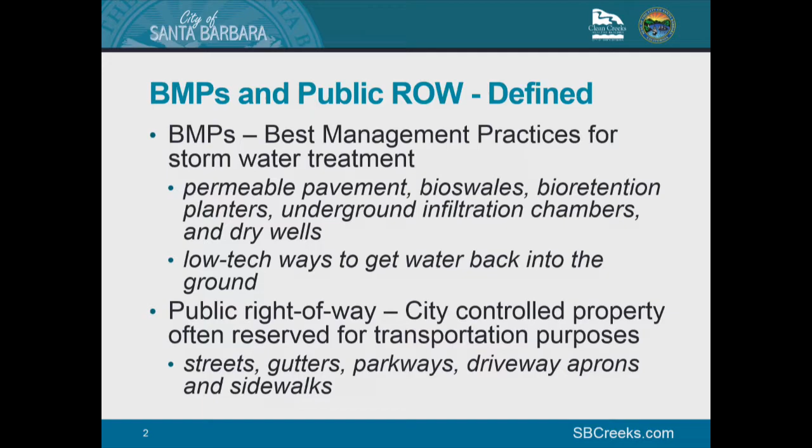The purpose of stormwater requirements in the public right-of-way is the same as for private parcels. It's to remove pollutants from stormwater falling on impervious area and to make development more water quality friendly. Not all projects proposed in the right-of-way are required to meet stormwater requirements. Only discretionary projects are required to meet stormwater requirements. So this is in contrast to a ministerial project or a staff-approved project. Discretionary review includes Single-Family Design Board, Architectural Board of Review, Historic Landmarks Commission, Staff Hearing Officer, and Planning Commission.

If your project needs to go to any of those and it proposes at least 1 square foot of new or replaced impervious area in the right-of-way, it's going to have to do stormwater requirements. So Tier 2 requirements kick in between 1 and 500 square feet of new or replaced impervious area. A Tier 2 project is really a demonstration project. Hopefully, it's more than that, but at a minimum, just one of the BMPs has to be installed.

So Tier 3 projects, on the other hand, that's when 500 square feet or more of new or replaced impervious area is proposed. And that involves treating a 1-inch 24-hour storm for a specified project site.

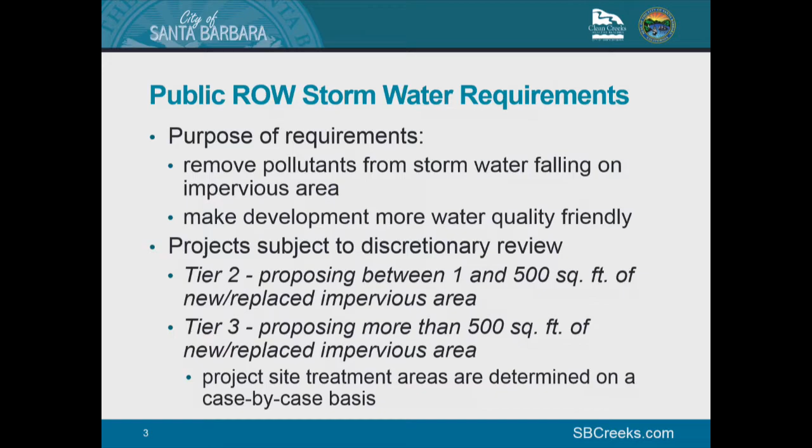In contrast to a private parcel Tier 3 project where the entire parcel has to be treated, since the public right-of-way encompasses the entire city, when Tier 3 is triggered, you don't have to do the entire city for stormwater treatment. There's a set project area that's determined on a case-by-case basis for that project.

Some recent Tier 3 projects in the public road that you might be familiar with: Las Positas Road Cliff Drive Roundabout, the La Cumbre Road Sidewalk Infill Project, the Old Coast Highway Sidewalk Infill Project, and all upcoming bridge replacement projects. Those are all Tier 3, and they installed extensive BMPs in the right-of-way that are treating a lot of road runoff.

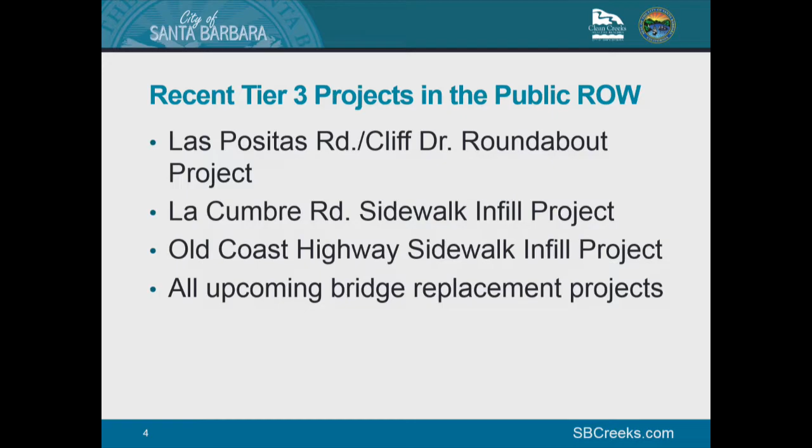Next, we'll talk about the different types of BMPs that can be installed in the right-of-way. One type of BMP that we're pretty excited about are dry wells. We don't have any of these installed in the right-of-way yet, but these are large underground concrete chambers. They fill up with stormwater. We install them over gravel and a really sandy soil to get a high infiltration rate.

And one caveat on these is that they have to be installed where groundwater is really deep. We can't install them where groundwater is shallow because there's not enough treatment that happens, and we don't want to pollute the groundwater. So we're really looking for a minimum of 30 feet from street level to groundwater, but preferably much more, 50, 80, 100 feet to groundwater.

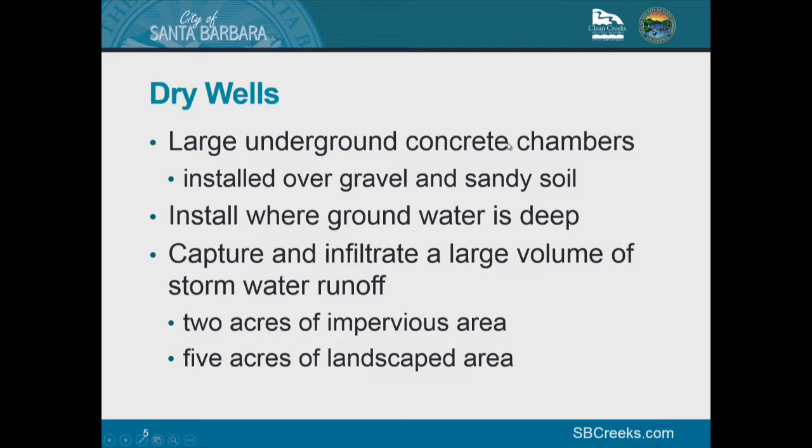So with a dry well, you can capture and treat a really large volume of stormwater runoff, up to 2 acres of impervious area and 5 acres of landscaped area for up to 7 acres total of stormwater treatment. As I mentioned, no dry wells currently in the public right-of-way, but the Creeks Division is planning to do a pilot project where we install 2 dry wells in the public right-of-way to see how they work.

We have high hopes. We're thinking that they're going to be a really efficient use of space in the right-of-way. Very small footprint. You won't see much on the surface. You might see a couple manholes and an inlet for stormwater to flow into. But all of it's underground, and there's a lot that happens underground. We'll get to that in a minute.

We're also hoping that it's a low cost per acre of stormwater treatment. I mentioned, up to 7 acres. We're not sure on the cost yet, but we'll have a better idea after the pilot project. But we're thinking it's going to be a pretty efficient stormwater treatment cost. As an added bonus, groundwater recharge and improved creek and ocean water quality come along with dry wells.

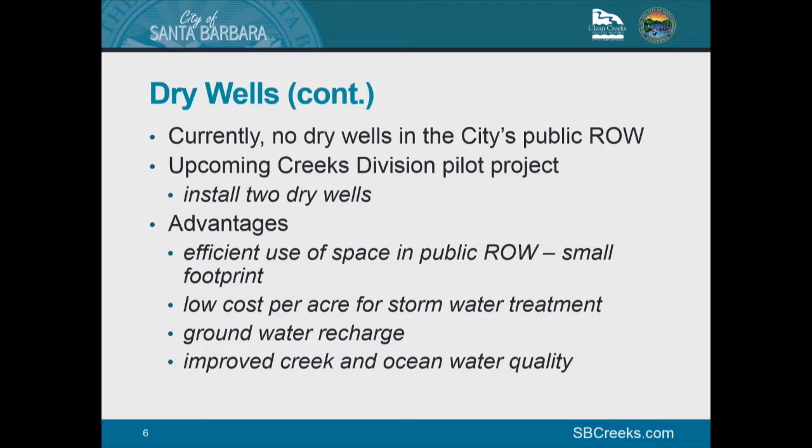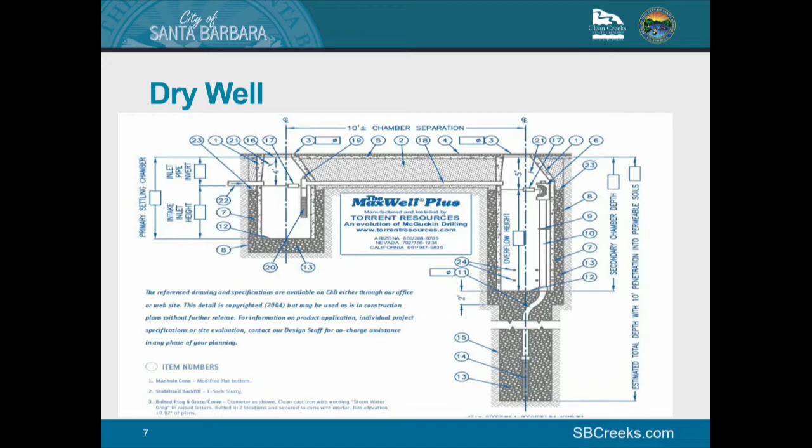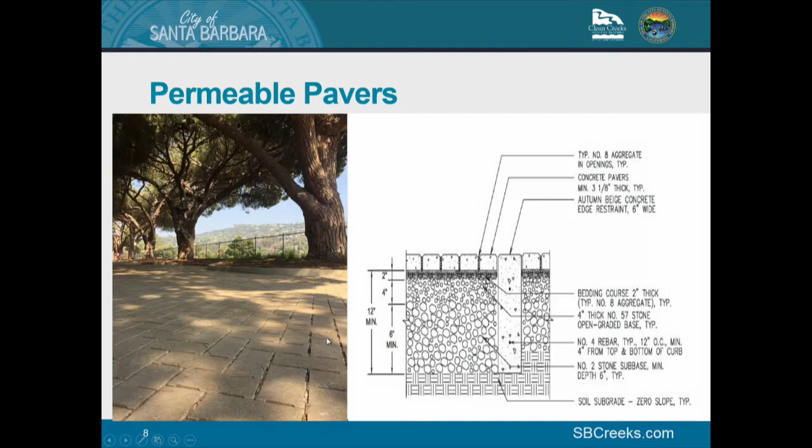Permeable pavers are another type of BMP that's commonly installed in the right-of-way. The Creeks Division has installed a lot of these all over town. I know you all are very familiar with them. We've got them installed on sidewalks. We've done alleys. And this photo on the left is of Quarantina Street. I think you might have all been out there. We've got 2 blocks of street that's done in permeable pavers.

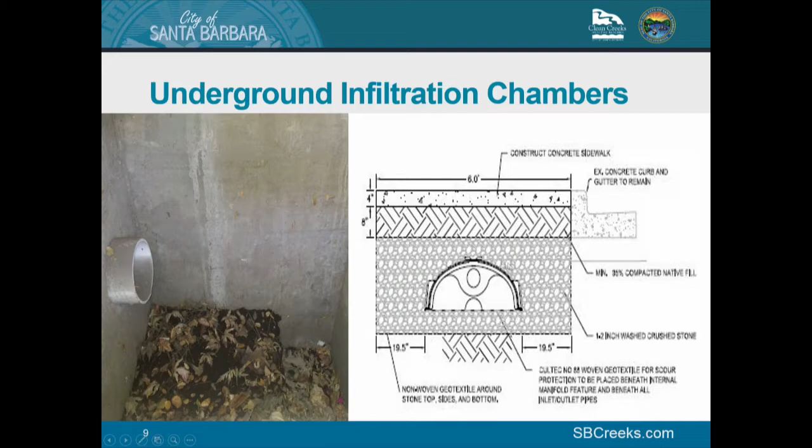And although it's really tough to get a shot of what an underground infiltration chamber looks like once it's installed, I've got this schematic where you can see where this pipe enters. This circle in this chamber is where the stormwater will enter. And it fills up this chamber, and as that chamber fills, it also spills out into this gravel area around the chamber. So there's quite a bit of capacity with some soil below that's hopefully uncompacted, and we can get a lot of infiltration.

Permeable concrete is another BMP that's been installed in the right-of-way. This photo is of La Cumbre Road, the sidewalk infill project. In the foreground, you have permeable concrete. Notice how it looks different than the concrete behind it. This is regular concrete in the background here. And the difference between the two is that there's less fines used in permeable concrete. There's less sand installed. So it doesn't look as smooth, but without that sand, you get really high infiltration rates in that permeable concrete, and water just percolates really readily down through.

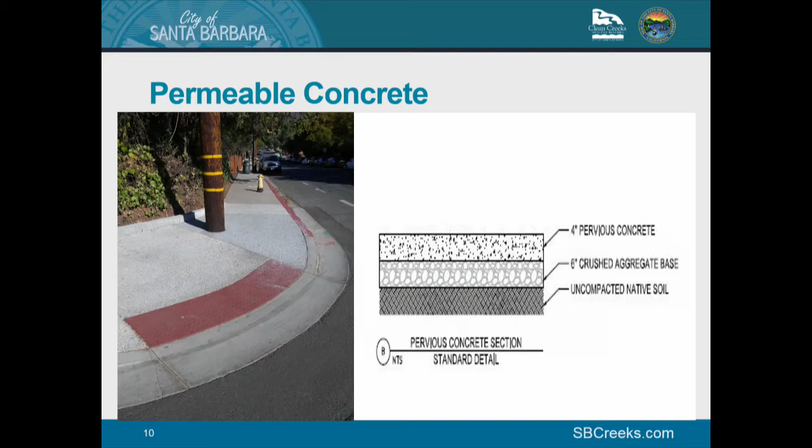On this schematic or this cross-section detail next to this photo, one thing I want to point out is the importance of the soil compaction. This particular detail has uncompacted native soil, but what we like to see in a permeable pavement installation is about a 90% compaction. If it's overcompacted, you really lose a lot of infiltration capacity. So we're looking for that loosely compacted soil that's also stable but not overly compacted.

Here's a photo of a bioretention planter. This was taken at the new roundabout at Las Positas and Cliff. And this particular planter has a lot of capacity to take on street runoff. So this curb cut here in this photo, water can flow into it. The basin's depressed a little bit so water can pool up.

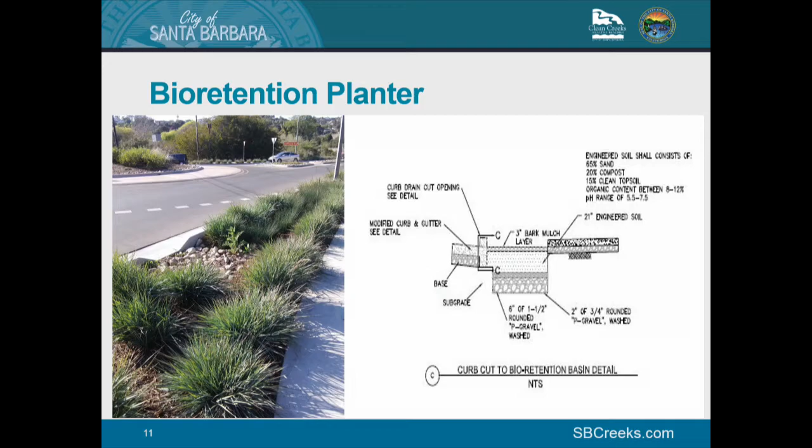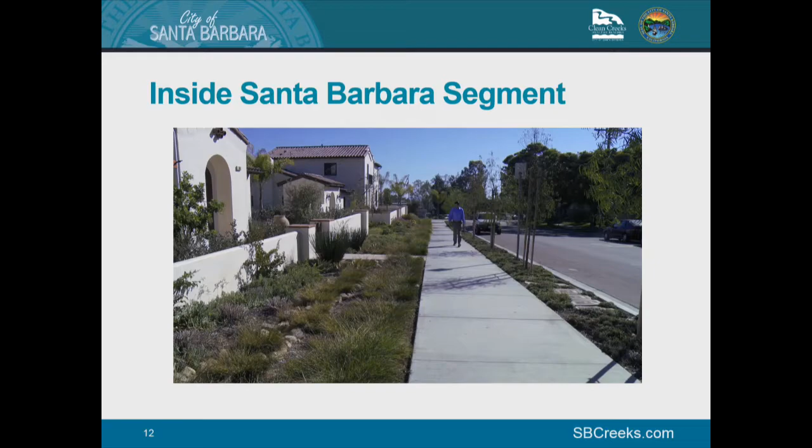But what's really important is what's underneath, the soil. In this cross-section detail, you can see that there's an engineered soil media that's really sandy. That media has a really high infiltration rate, so water can percolate pretty quickly down through and give us a lot of treatment and infiltration in a small area. Now I'd like to show you a video. It's about 5.5 minutes long of a recent Inside Santa Barbara segment focusing on BMPs in the right-of-way.

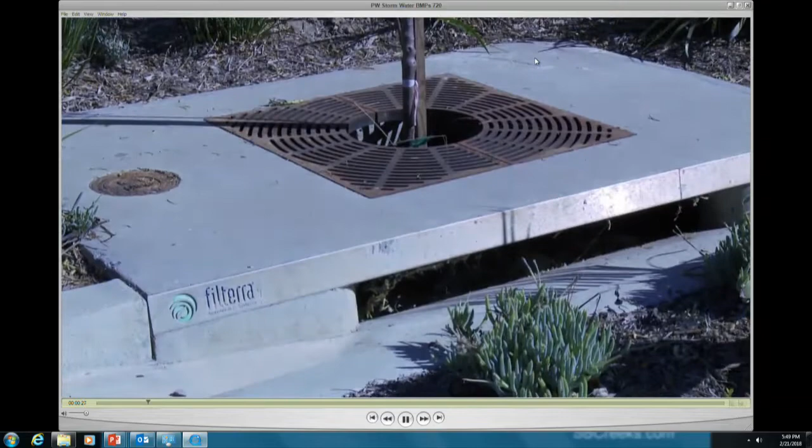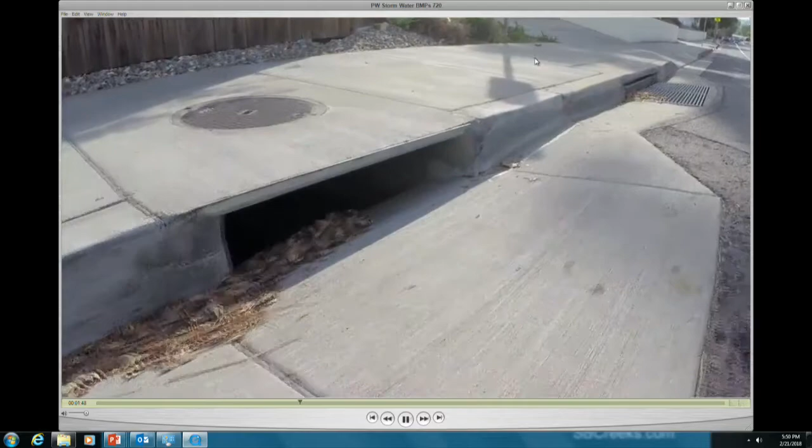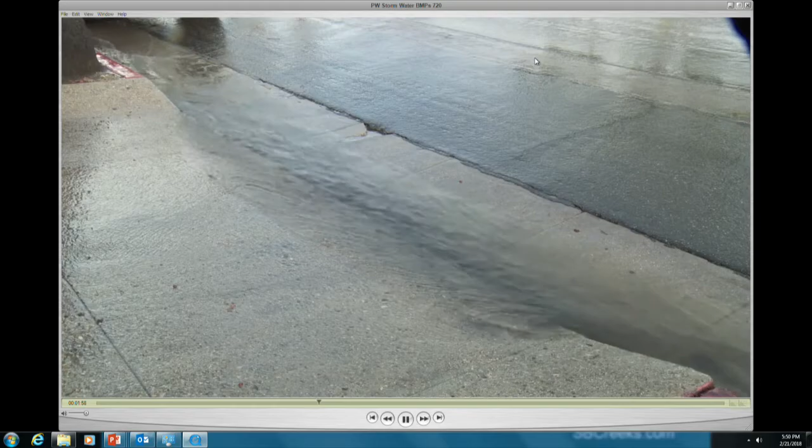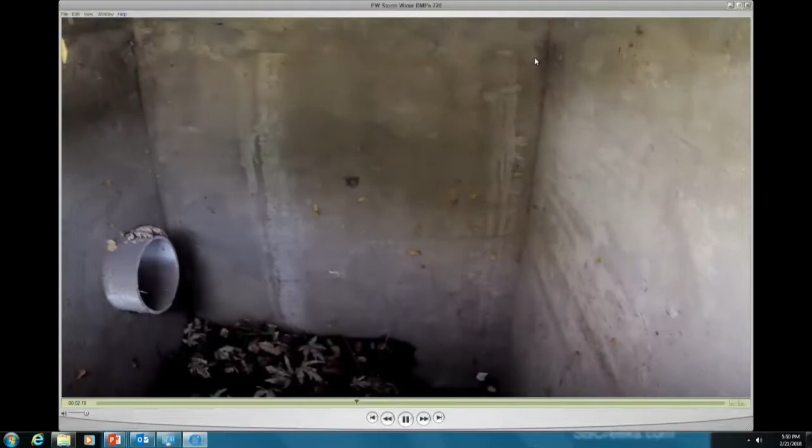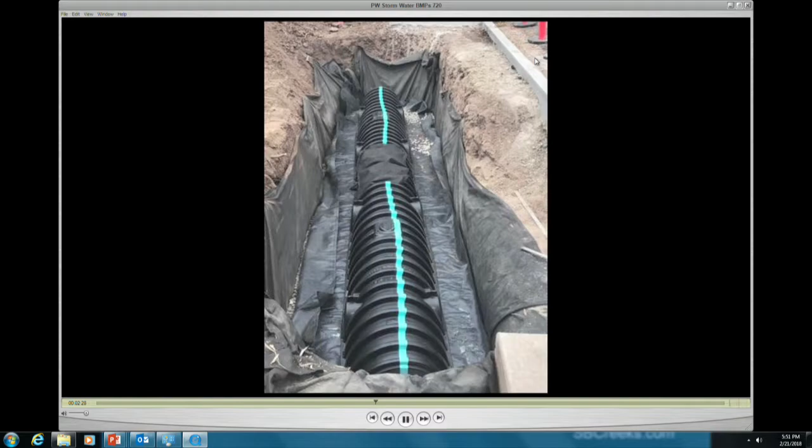Capture the water before it got there. So we installed a new basin here that's going to catch all the roadway and driveway runoff, and some of the sidewalk runoff goes into the basin here, and this one has an open bottom to it, and some water will infiltrate through there. Then as it ponds up to a height of 1.5 feet, there's an outlet pipe that goes into stormwater storage tanks that are underneath the sidewalk here, and it will over time infiltrate that into the surrounding soil. The third stormwater BMP used in the sidewalk infill project is more obvious.

It incorporates a new twist on an old construction material. So here at this intersection, we're at Via Lucero and La Cumbre, we installed pervious concrete ramps, and the infiltration rate for pervious concrete is incredibly high. Pretty much everything that hits it is going to go straight through. And we're also capturing some of the runoff from the sidewalk here and here, as well as this off-site, which was unintentional, but it's going to treat all that area as well.

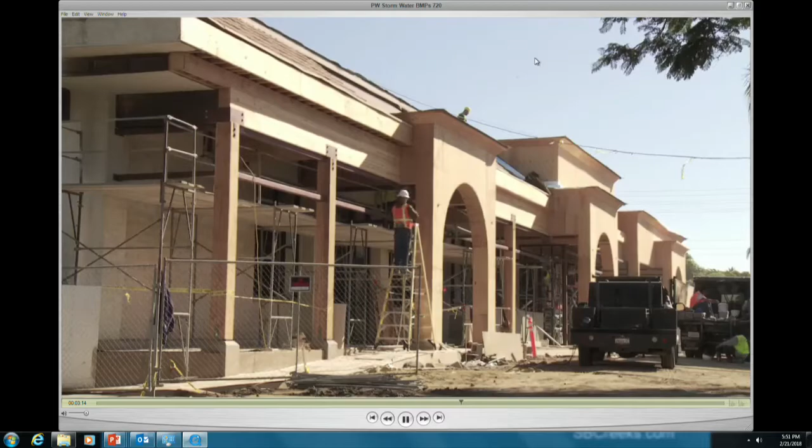In response to more stringent statewide stormwater runoff regulations, most new development, whether public or private, now needs to incorporate some sort of BMP. We're required to install these whenever somebody wants to build something over a certain size, and there's design review required. That's the regulatory issue.

The other issue is we have an impervious area problem in the city, and the idea behind stormwater treatment is to alleviate some of that impervious area issue. When you have too much impervious area, stormwater flows off too quickly and enters the creeks and ocean untreated, which creates a water pollution problem.

And while larger, more complex stormwater BMPs can be expensive, there are really simple BMPs anyone can do for practically nothing. We see a lot of residential projects disconnecting their downspouts, where instead of piping the water from the roof to the street, the downspouts from the roof are disconnected into a planter or the landscaping. And that can have a big impact over time on water quality. Just that simple measure.

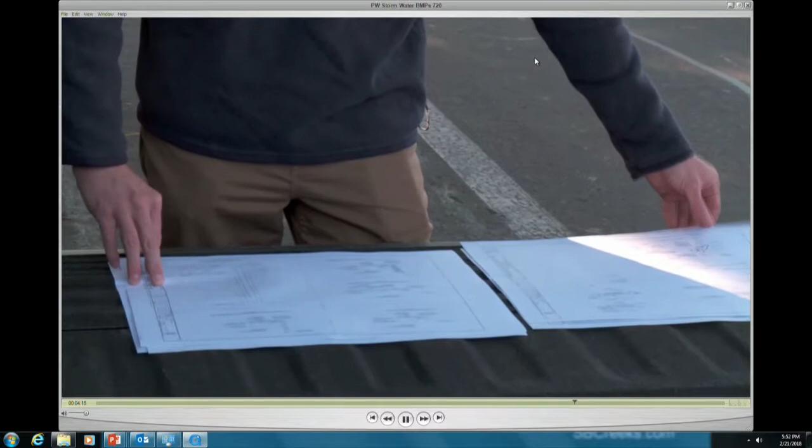The Creeks Division is continually researching new stormwater best management practices. The latest, known as a dry well, is about to be tested in a pilot project. You can think of them as large cylindrical concrete tubes that are installed underground, and they take up very little room. We're thinking about installing them at an intersection at a couple places in the city, and it could really be a good method for public works to use to treat stormwater in the future because they're cost effective and can treat such a large area.

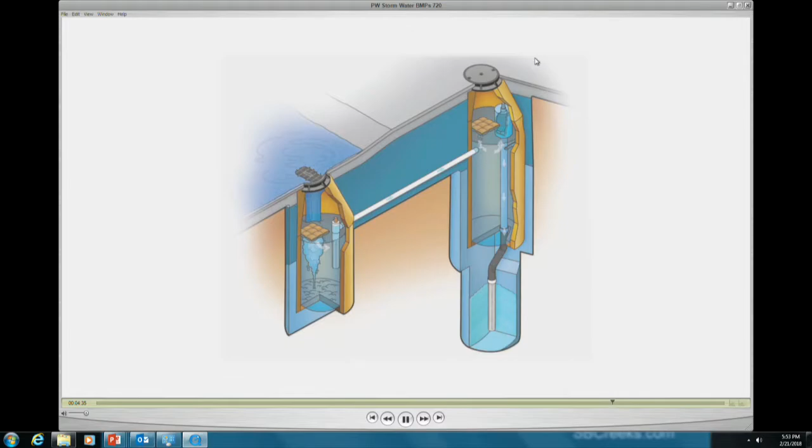So the next time you come across a large public works project, look carefully. You're likely to find stormwater best management practices, and maybe some inspiration too. This has been one of the first projects to implement these types of measures, and so it's a great place if you have a private development, if you're struggling with how to meet the requirements for the water permit. This would be a great place to come and look and see what you want to do at your own house. So we had a head start, but we still have a long way to go.

We've got over 20,000 parcels in the city, and right now our highest level of stormwater treatment, which we call Tier 3, where at a minimum you're having to treat all the stormwater from a 1-inch 24-hour storm for all the impervious area on site, we only have about between 200 to 300 of those installed. So when you've got a city with as many parcels as Santa Barbara, we have a long way to go.

All right, that's all I have for you all. If you have some questions, I'm happy to answer those. Are there any questions for Jim on the presentation?

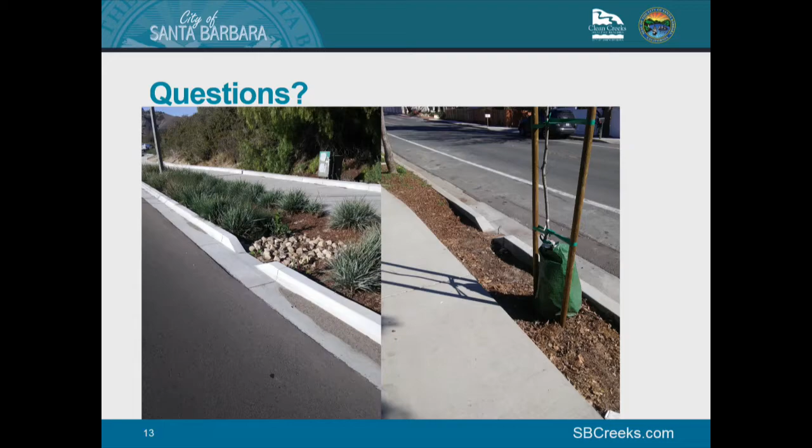Right. Well, I would just point out that's what you're seeing here. On the other side of the sidewalk is private property, but what's happening here is that the city is redeveloping the streets and the sidewalks, and so the requirements are being triggered for the city, for all of us, and so this is one of the BMPs that they're utilizing to treat street runoff and sidewalk runoff, and they are being installed in front of commercial properties, residential properties, and other places around the city.

I don't know if you know the answer, because it's one of the things that makes Mr. Buell's life infinitely interesting, but average unit-size density projects and accessory dwelling unit projects, do any of the incentives or requirements for these kinds of things hold for those? So for AUD projects, yes. If it needs discretionary review and it's over a certain size of new or replaced impervious area, yes, for AUD projects. For ADU projects, or most of them, no, because they are ministerial. They don't need discretionary review.

However, I've seen a few of them that require a modification. They're requesting a modification usually for a smaller setback. And for a modification, you need to go to the staff hearing officer, which is a discretionary review. So by going and getting that modification, that ADU becomes discretionary and it's subject to stormwater requirements.

And finally, there's a trick that usually only happens successfully in movies or in Las Vegas, but since we're in the middle of the worst drought in 150 years, if we install all of these things to work well, they're kind of predicated on getting some minimally normal rainfall, aren't they? That's true. Yeah, we do need some rain for them to work.

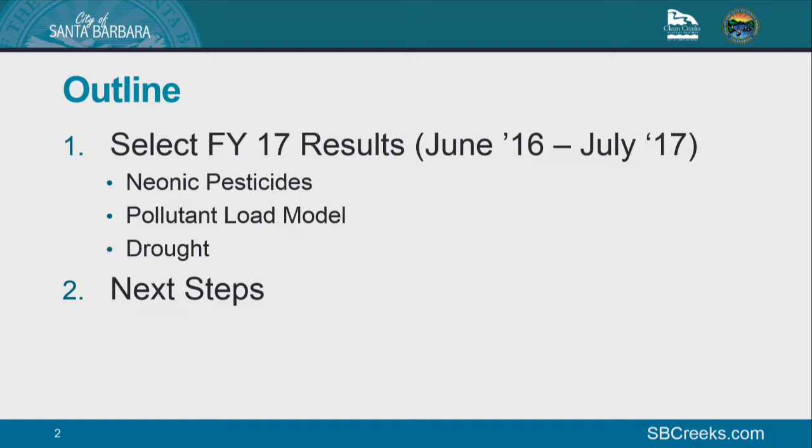So I've talked about neonic pesticides every year. We're in the middle of a collaborative research project. It's funded by NOAA's California Sea Grant program. It's a collaboration between Creeks Division, UCSB, led by Hunter Lenihan, and also involves Eric Muller and Jay Means, and USGS, the United States Geological Survey, with Michelle Hladik. It's an integrated effort. We're doing the field testing. We send the samples to USGS, and I'll talk more about those results. And then UCSB is conducting laboratory toxicity tests and modeling the potential ecological impacts of what we're finding.

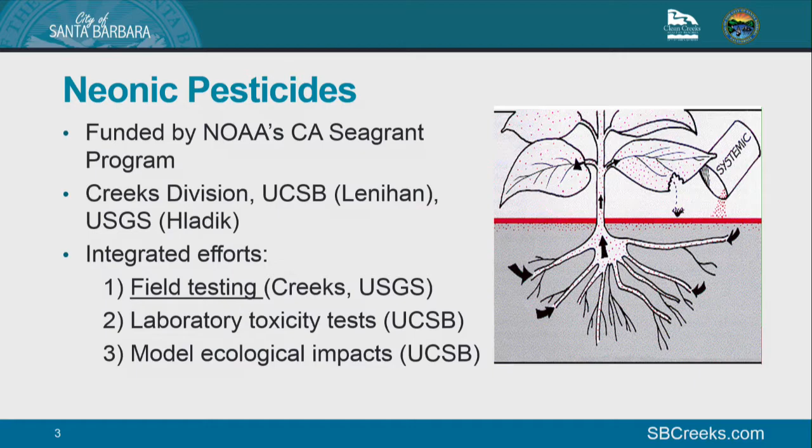The schematic here reminds me to talk about these pesticides. Neonics, and I'm also going to talk about another one, fipronil. They're systemic pesticides. So unlike the types that you spray on a plant, where the pest would touch that poison and be harmed that way, with these either the seeds are coated in it or the pesticide is spread around the roots, and they're really soluble. So the plant takes it up and makes the entire plant tissue toxic to any organisms that chew or bite on that plant material. To be able to do that, you have to make the pesticides really soluble. And so they behave really differently in surface runoff than some of the other pesticides that we're used to looking at.

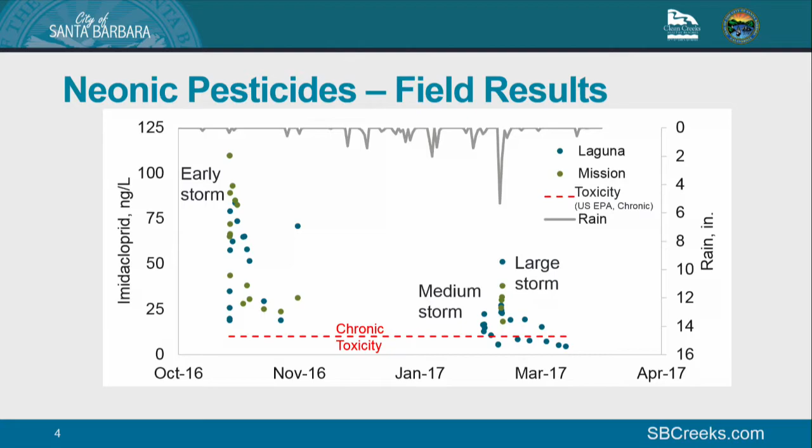So we already knew going into this winter that imidacloprid was very pervasive, but we did not know how persistent it was going to be and what concentrations these aquatic organisms are exposed to for days to weeks. We still don't; these concentrations are very low. We don't know the ecological impacts yet, and UCSB is pursuing that, and hopefully we'll be talking about that with you soon.

We're always trying to tie these results into outreach materials, and I think we need to do more. This is a pretty big deal, but tomorrow we are going to the Landscape and Barbecue Expo, and we have a poster directly targeting this and incorporating some of these results.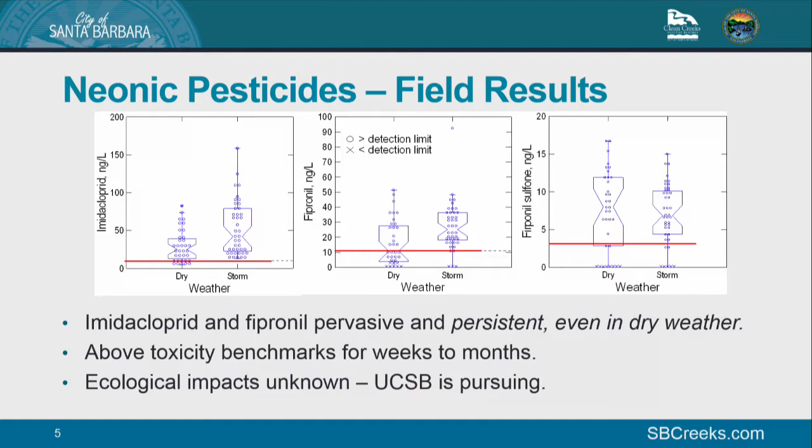So we jumped in with a stakeholder process that the regional board hosted along with a consultant to develop a free model. It was touted to be free for all the municipalities that would use it, and TELR gives a total estimate of load reduction. And there were also alternative models available at cost. But as soon as the stakeholder process was over, it was changed to be a several thousand dollars per year fee to use TELR.

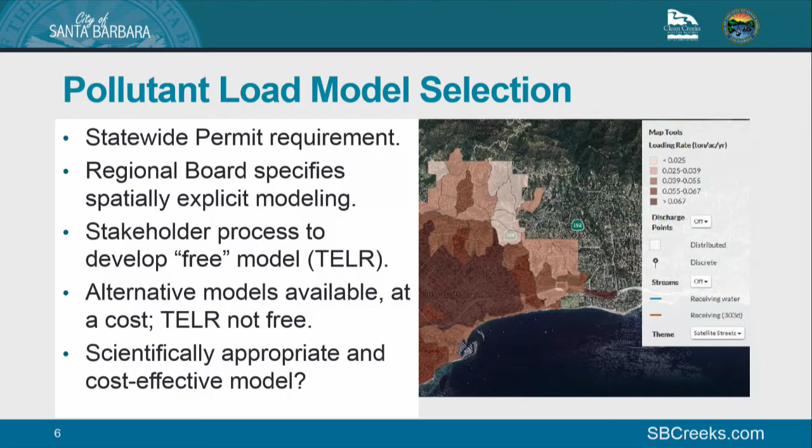The entire time we went along with the stakeholder process, knowing we were going to compare models, because we really want to know what's the most scientifically appropriate and cost-effective model for us to use. Even if we're required to do it, we still want it to be something that hopefully we can utilize.

Because of the proprietary nature of the models and lack of willingness of the consultants to try our different comparative approaches, we weren't able to compare them. So we moved ahead with the TELR model, largely because we had already invested a lot of time with two really good interns from UCSB creating all the GIS inputs that we needed for these models.

And so we got the outputs back, and there were so many problems with them. Here's one example. The panel on the right shows the western side of Santa Barbara, and where that yellow star is, that is a sub-catchment around Oak Park near Cottage Hospital that really stood out as having very low pollution producing potential. So an area you would not want to put a BMP. And this just did not make any sense to me. It's a highly impervious area.

And so it made us spend yet more time digging around trying to understand the inputs to this model. And it relies really heavily and incorrectly on some inputs such as soil type and land use. And I didn't even really want to print the models because I did not want to create this institutional knowledge that somehow this area was not worthy of a dry well, for example. It was false precision to make it look like it had a scientific basis to not be as pollutant generating.

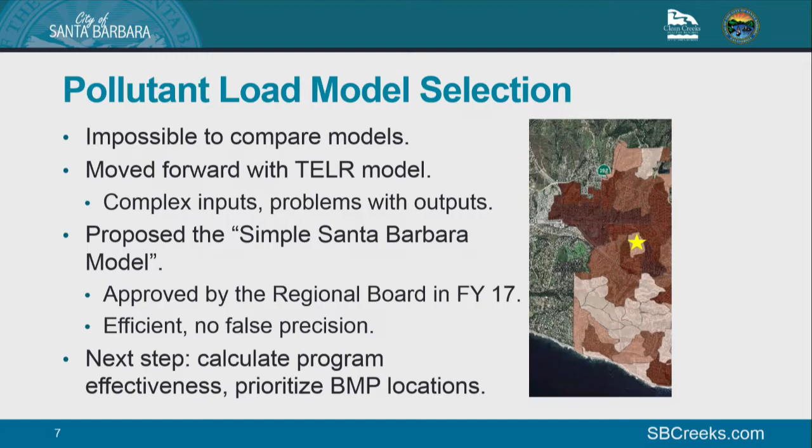So here's a schematic of how rainfall gets to our creeks. The rain comes; it doesn't show the surface runoff, but of course you have surface runoff right away. You also have percolation or infiltration into the ground. Some of that goes horizontally towards the creeks right away, called interflow, and that produces some of our wet weather base flow, or our receding limb of the hydrograph. And then a lot of it gets into the water table, and that is what provides the water for our base flow all year, which is so important to our creeks.

And you can see here, if we put a monitoring well down from the surface into the water table, we can measure how that water table elevation changes over time. And there are dozens of these monitoring wells installed throughout Santa Barbara. They're not owned by the city. They're not drinking water monitoring wells. Drinking water is far deeper, comes from the aquifers that are below our impermeable clay layers. These monitoring wells are installed anywhere there's a leaking underground storage tank or a site that needs remediation. And the state has an amazing big data set where you can acquire the chemical and water level data from all of these monitoring wells.

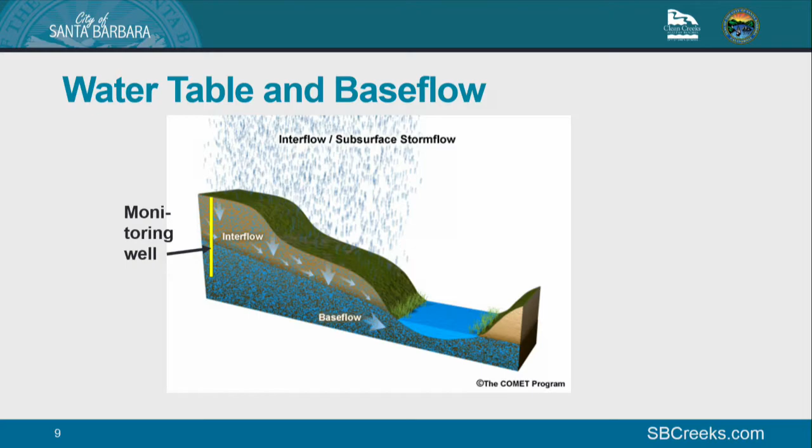So looking at one, you can really see how that water level changes over time. This is a monitoring well located at Carrillo and Chapala, so it's in the Mission Creek watershed around Carrillo Street. The yellow is the depth to groundwater in feet. The surface is the hatch line, averaging about 50 feet to the water table. And then on the bottom is the rain in inches per day.

And so you can see from 2004 to 2013 that the water level hovered around 50 feet, drew down during the summer, was replenished during the winter. And then during this drought, it has just steadily decreased. We had a slight bounce in 2015, and I don't have the FY17 data. It wasn't available yet for this well.

But all of our storm drains are dry. We have a permit requirement now to sample all of our flowing outfalls. There aren't any. The only flowing outfalls are the West Side Drain, which is really the headwater of Old Mission Creek, and it's really low, and this is February, and Laguna Channel, where it comes out from under the freeway.

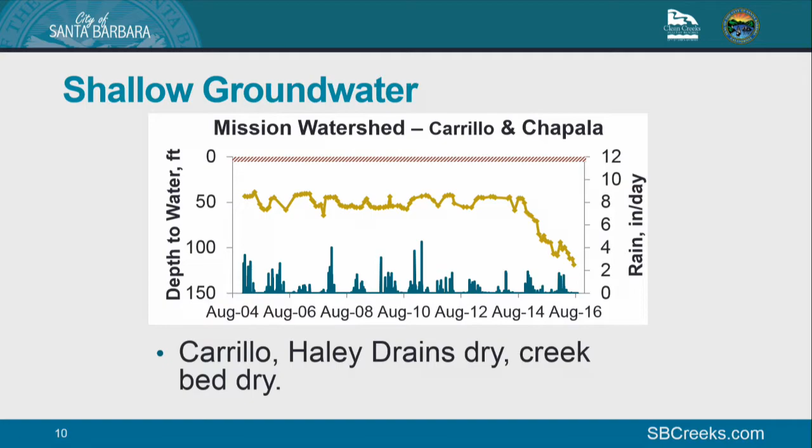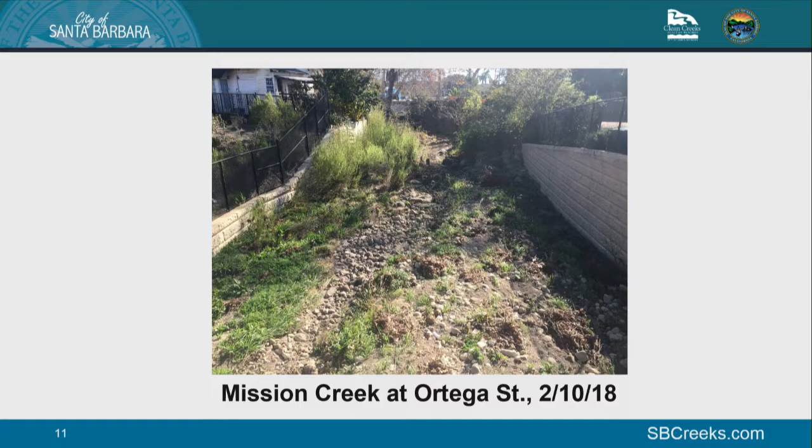It's also really low. And here's a picture that Tim Burgess took just a couple of weeks ago looking at Mission Creek at Ortega Street. This is not okay for February. This is really horrible. And we've got our short-term drought. We've also got our climate change.

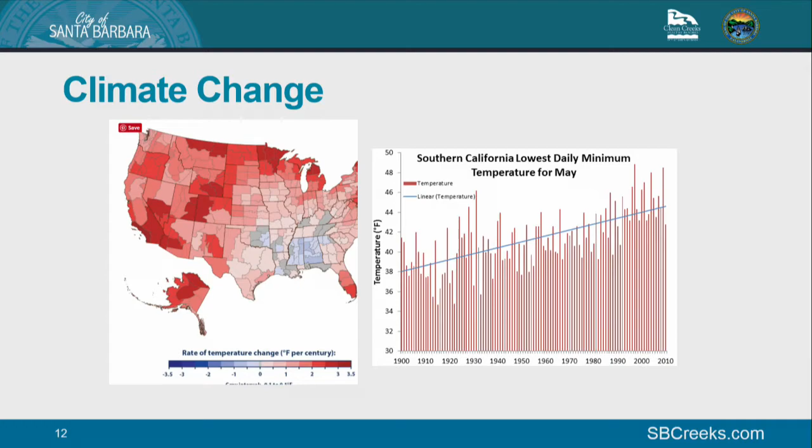The map on the left shows the rate of temperature change per century for the U.S., and you can't see it with the lighting in here, but the section for Southern California is a shade darker than all of the other areas of California. And Santa Barbara really is right at the epicenter of this temperature increase. And then we've got the precipitation also. The right side shows the nighttime lows have increased 6 degrees since 1900. So it's really having an impact on our creeks.

So now back to the presentation we just saw. We really have a scientific basis, not just for the water quality improvement of LID and infiltration projects, which is really hard to demonstrate because there's no outflow for those projects, and not just for peak runoff reduction, which is also one of the main reasons often provided for infiltration projects, but for maintaining a water level above the bottom of the creek bed so that we can have healthy creeks.

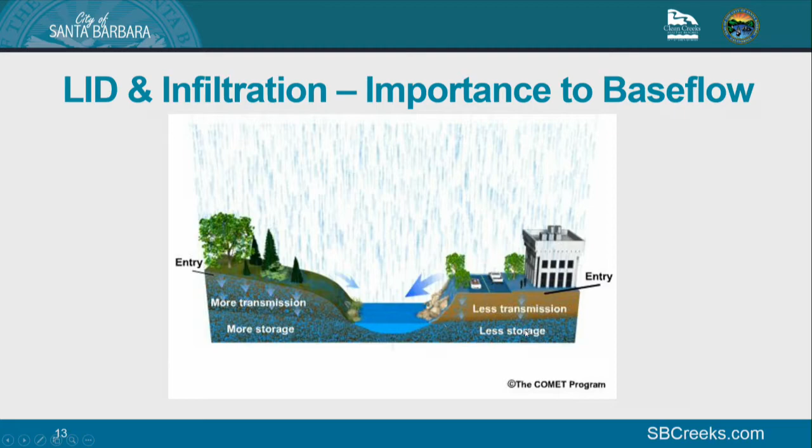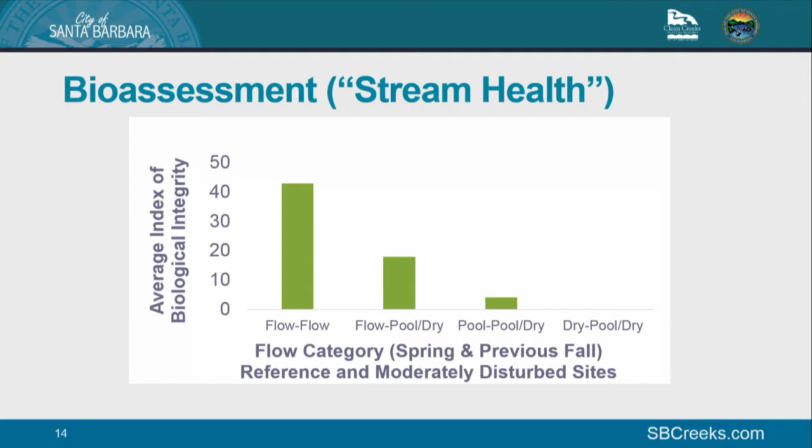So for the most perennial creeks, the ones that had flow at both times, the index of biological integrity is much higher, averaging over 40 compared to about 18 for the sites that had some intermittency, and really drops for the creeks that were dry for part of the year. And he doesn't score the sites that were dry. We just don't sample them. We move on to other sites. You can't really score something as a 0 with his scheme, but they are 0. There are no bugs there. The index of biological integrity looks at what types of bugs are in a creek community, and they're just gone.

So even though we had normal rainfall in FY17, the drought effects continued. A lot of that runoff came in that one big storm, so most of it did not have time to soak into the ground and replenish, as we can see by those monitoring well data. And many sites have now been dry for extended periods of time in all of our creeks. Our previous bioassessment work Jeff has done has shown that we have rapid recovery from fire impacts. The creeks fill up with sediment, but then they scour out the next year, and things appear to get better in terms of biological integrity. Same with scouring events. They might scour many of the organisms out, but they seem to bounce back.

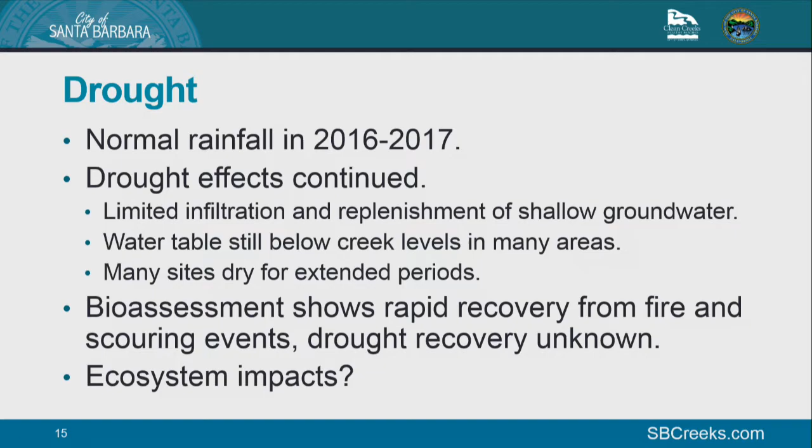But we really don't know for the drought recovery. Flying insects, can they come right back and repopulate? Time will tell. And we don't know what the ecosystem impacts are when you take this many insects out of a creek ecosystem, how many birds are going to be impacted. Obviously, larger aquatic invertebrates and fish are going to be impacted. Hopefully we'll understand that more later.

And just to finish up by talking about the next steps. I need to finish up some things with the report and get it on the website and make that available. We're in the middle of carrying out the FY 2018 research plan, and I did want to note that we added some storm monitoring to test the impacts of ash on water quality. We had a lot of watershed burned, and we've done that in the past. We've studied the actual erosion chemistry, but not this time.

We were looking for toxicity and metals and pHs that would get into the water as the ash was washed off into it. And this was driven, for me, based on reading a lot of questioning on social media about why we had all these notices about not hosing off ash during the fires. And so we want some data to understand that more.

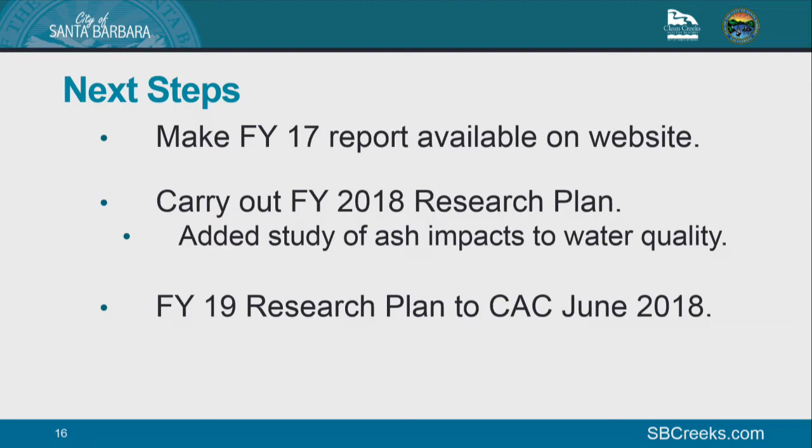And I'll come back to you in June with the next year's research plan. And possibly before then, you'll hear from Jeff Brinkman about more details of the bioassessment. And I'll take any questions. Thank you, Dr. Murray. A lot to think about, and a lot for Professor Holden to be reporting on in a couple of months.

Just since we're broadcasting this meeting, and students work hard but don't always get credit, do you remember the names of the interns who worked on the project with you? The one we have currently is Alvin Jung, and Dami's last name I was being forgetful about, which is why I did not mention it. Okay. Any other questions for Dr. Murray?

I have a quick question. I'm just curious, I think you said it was TELR, the modeling system was such a failure for us here. Have other municipalities experienced that, and are they improving it at all, or is that just... I don't know the answer to that question because I really stopped. Well, the whole stakeholder process ended.

I think there are quite a few municipalities that really had no choice but to go forward with it. They don't have staff that can try to throw together something else, or the documentation for TELR is, I think it's over 100 pages. It's really dense. There are parts that I had to read 10 times before I could even understand what was done, to understand what I didn't like about it.